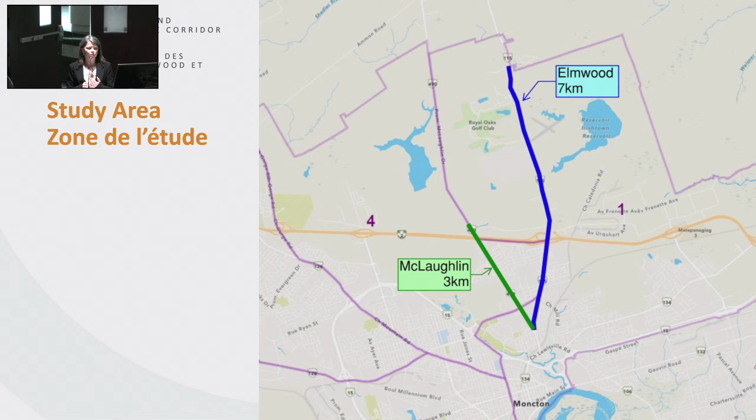At the end, feel free to ask in English or in French, your language of choice. Just as a reminder, the study area for this project included Elmwood Drive, about 7 kilometers long, beginning around the intersection of McLaughlin and Elmwood near Massey Avenue and extending all the way to Longfellow Drive. The McLaughlin Drive section was about 3 kilometers, starting at the same intersection at the south with Elmwood and McLaughlin and finishing near Granite Drive.

The objectives of the project were to update the city's transportation VISUM model and to assess some of the changes in vehicle traffic flows for future roadway connections and future land development in the area, and also to improve some operational efficiencies of key intersections and to plan for future transportation network improvements in the two corridors.

During the course of this study, which started in 2023, we did a lot of data gathering, including a lot of traffic data collection and review of right-of-way limitations along the corridor. In the image in the middle of the screen here, you'll see some notes about right-of-way.

The blue indicates the location where there's 20 meters of right-of-way. The green at the top along Elmwood Drive shows that there's about 30 meters of right-of-way, and the other locations have varying widths of about 24 meters.

Near the Trans-Canada Highway, there are some limitations with what we can do for infrastructure for pedestrians and cyclists. Underneath the bridges for the Trans-Canada Highway, in some sections there's only about 15 meters of space. At McLaughlin, and then at Elmwood Drive, there's about 17.5 meters of space.

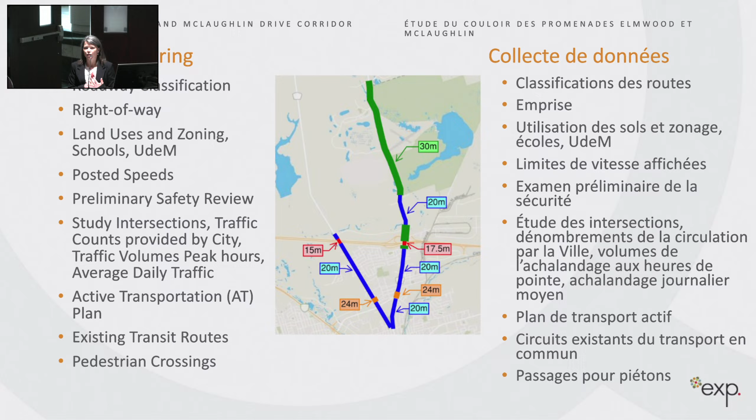I mentioned the VISUM model is a transportation model that the city uses to help plan for future road network improvements. The model was calibrated to the 2021-2022 population, and various scenarios were looked at for new roadway connections and trying to plan for future population growth in different sections along Elmwood Drive and McLaughlin Drive.

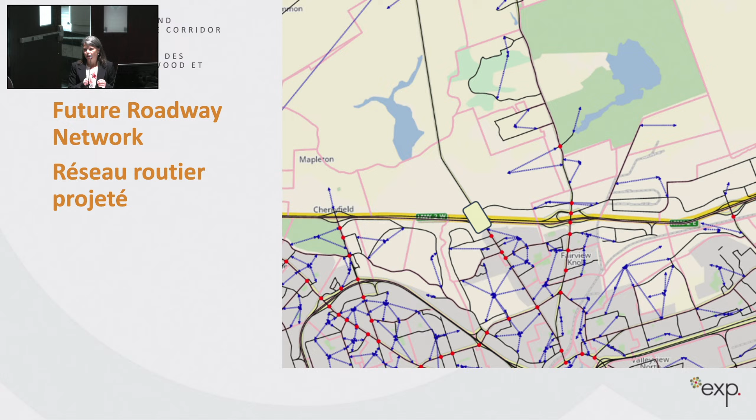In the VISUM model, there are links and nodes that allow us to project out how much vehicle traffic may disperse through the roadway network. So there were different scenarios that were looked at for new and future road connections.

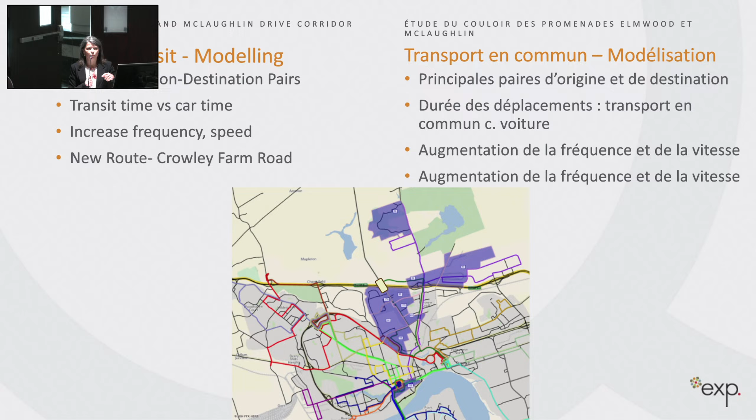There's also a component in the VISUM model that looks at transit modeling, but I won't go into those details. I want to get to the next slides about improvements. This slide shows some of the key intersections that were analyzed for vehicle delays in traffic operations, and where improvements were proposed.

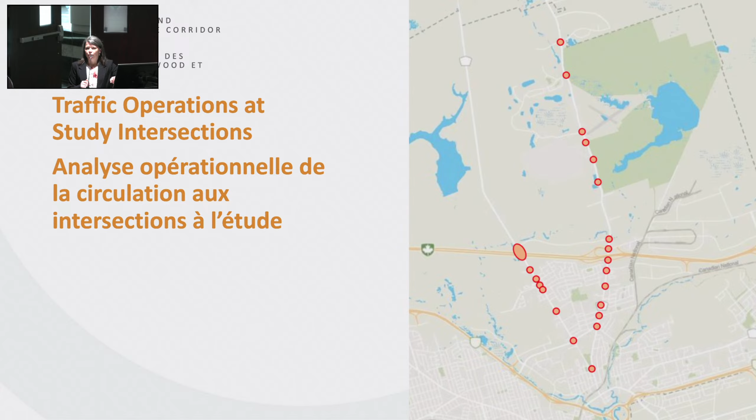As part of the analysis of different scenarios for road network improvements, scenarios 1, 3, 4, and 7 were analyzed for new roadway connections. I'll specifically mention scenarios 3 and 4. Scenario 3 had a new future connection to McLaughlin, from McLaughlin Drive to the Trans-Canada Highway.

In scenario 4, we looked at traffic volumes that might be generated or redirected if Crowley Farm Road was connected to Leopold Belleville Drive and to Morton Avenue. Future scenario 7 looked at all the future road network improvements along the corridors.

After doing all the analysis and coming up with a list of recommendations, there were key considerations important to highlight—more general recommendations for both corridors. Some included improvements to managing vehicle left turn movements along the corridor to improve safety for vehicles traveling on Elmwood Drive and McLaughlin. These aren't recommendations specific to a location, but more general for the entire corridor.

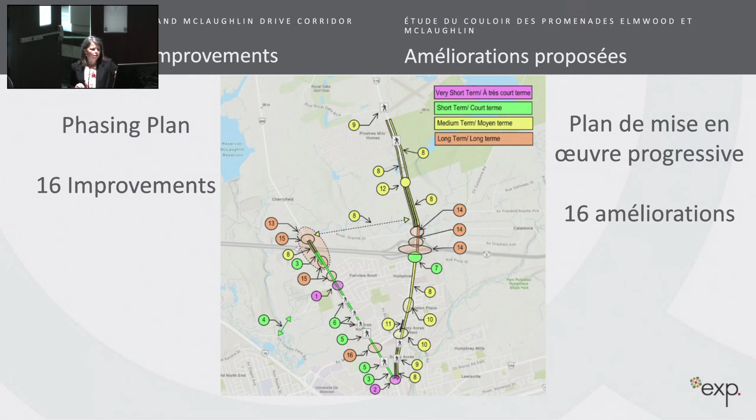Some concept plans were developed as part of the project to highlight the specific improvements that might be implemented on Elmwood Drive and McLaughlin, and these help us determine how much this could cost in the future.

The image on screen shows an orange line on the right-hand side, representing the multi-use path recommended to be constructed in the future. On both Elmwood Drive and McLaughlin, it's recommended to be installed on the east side.

The cross section shown is a 20-meter cross section, and we feel that with this 20 meters of space already available on these two sections, this would be a good compromise. I say compromise because sometimes cyclists and pedestrians don't like to share the facility, but because of right-of-way limitations, it was felt to be an acceptable compromise for pedestrians and cyclists to share it.

The middle portion of the cross section shows three lanes for vehicle traffic, though three lanes aren't necessary for the entire corridor length. Some places might want a left turn pocket for vehicles, while other locations could use the additional lane for a bus lay-by. With the 20 meters of right-of-way, we feel this would be a good cross-section for these two streets.

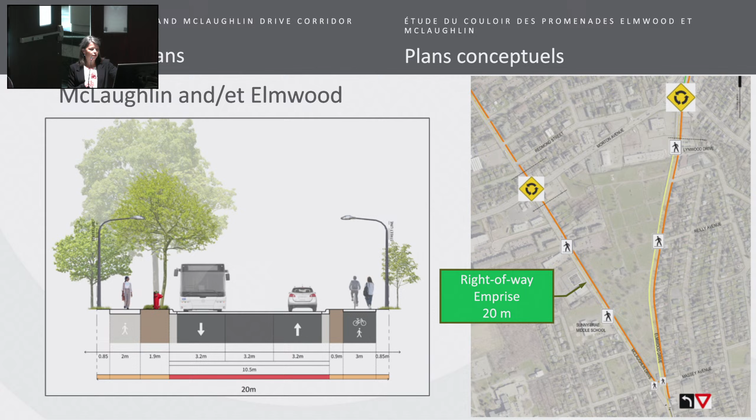This median doesn't necessarily need to be implemented throughout the corridor, but it's something to consider as the project advances in the design phase. It's a preferred cross-section to ensure motorists don't have to slow down and wait for somebody in front of them to make a left turn movement.

These aren't telling you that this is what must be built. It's just a recommendation of what could be built and what you might want to look for in the future if there's opportunity to buy additional property to provide this type of cross-section on the corridor. There are acquisitions that might be required.

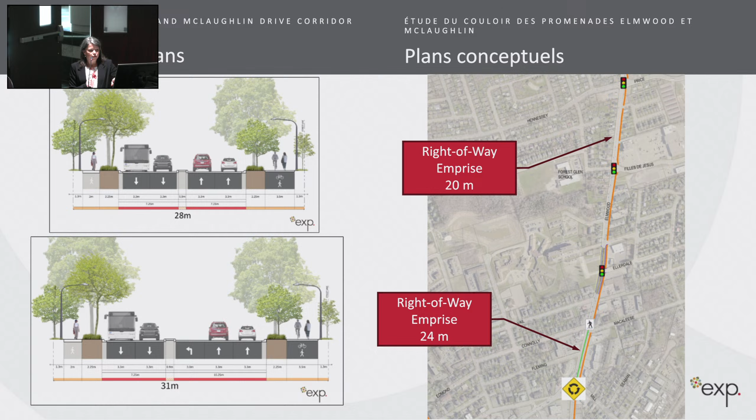The next slide shows the continuation of Elmwood Drive north of Hennessey to Granite. The traffic operations analysis showed that with roundabouts at the three major intersections here, vehicle delays would be less than if it stayed as a signalized intersection. The red rectangles in the middle of your screen show limitations again with right-of-way, and those all have to be considered in the future.

The multi-use path is still the recommendation for providing a safe space for cyclists to cross through this area because of the space requirements. This facility would offer a better compromise in solutions to provide facilities that are safe for both vulnerable users, the walker and the cyclist.

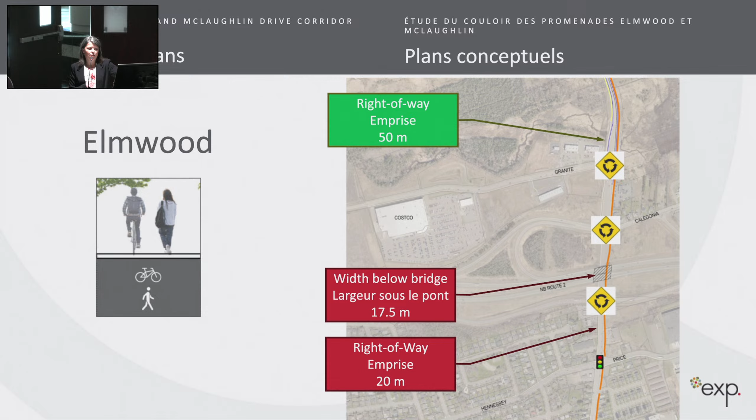Just a continuation of Elmwood Drive again, north of the Trans-Canada Highway. There are a couple of locations where the right-of-way is limited, shown in red, with the right-of-way only being 20 meters. The continuation of the multi-use path is shown on the east side, and it would terminate, or connect to, the existing path at Cedarwood.

There are some new pedestrian crossings recommended along the corridor, as well as a new sidewalk on the west side. Just north of Granite Drive, the sidewalk terminates and doesn't go anywhere. So if you need to walk along Elmwood Drive, either to take the bus or just because you live in the area, there is currently no facility for pedestrians or cyclists to travel along this corridor.

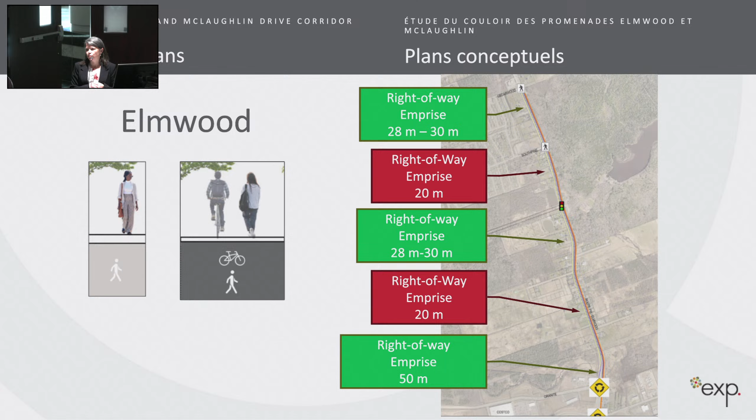And the last slide here for Elmwood shows new pedestrian crossings at Royal Oaks Boulevard and Longfellow Drive, and a new pedestrian crossing at Cedarwood as well.

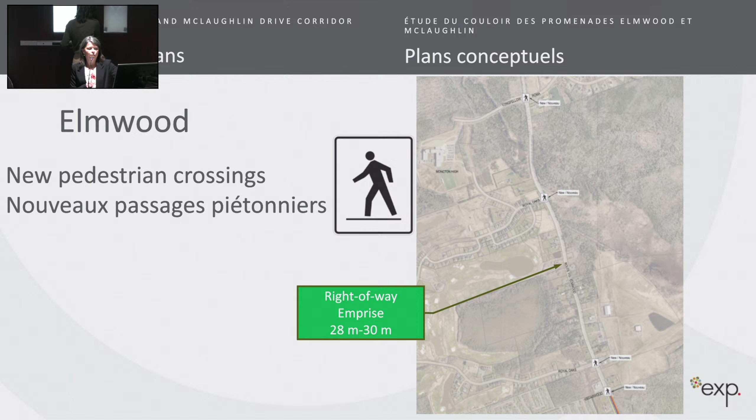The next two slides are for McLaughlin. The orange line shown on the east side of the road shows again the continuation of the multi-use path recommended to be constructed. The right-of-way along the corridor here is about 20 meters, so there shouldn't be any need, or very little need, to acquire right-of-way.

There might be some relocations of hydrants or utility poles if the project goes ahead with the three lanes for vehicle traffic, but at least the right-of-way appears to be adequate to provide the three vehicle lanes, a multi-use path on the east, and a sidewalk on the west.

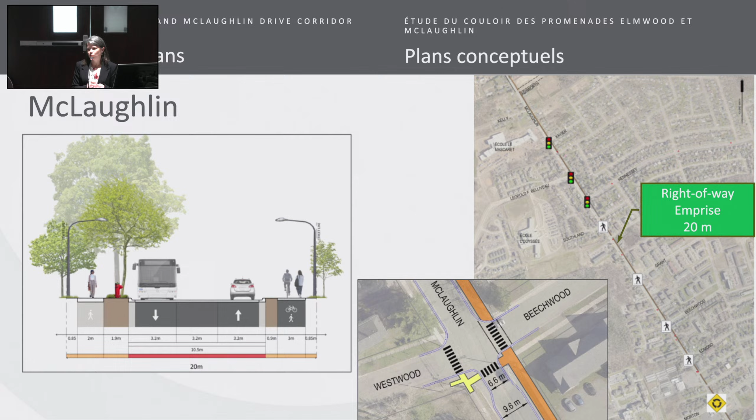There are some pedestrian crossing improvements recommended as part of the report to narrow the crossings. Currently, if you need to cross the road, it's about 10 meters, but in certain situations there's a possibility to reduce the crossing distance to as little as 6.6 meters, so it takes less time for the pedestrian to cross when the path is narrowed. The next slide is a continuation of McLaughlin Drive, north of Leopold F. Belliveau.

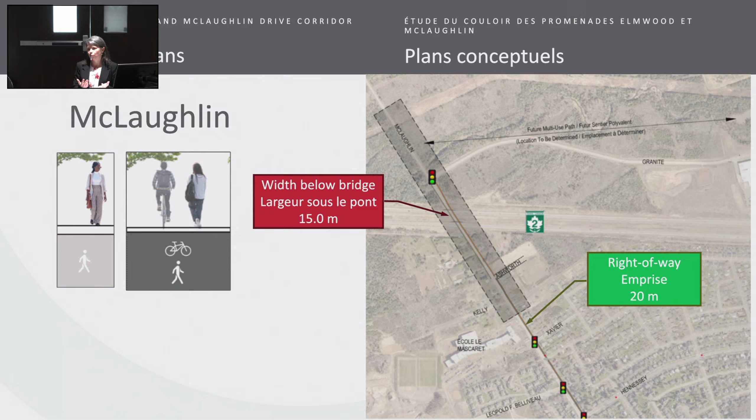The area here shows there are some limitation requirements with right-of-way. There's a future area where there could be an interchange with the Trans-Canada Highway. However, the plans for the interchange have not been finalized, so this just shows the area that would be impacted by new ramps.

The cost to build the entire project improvements was about $31 million. There are different details of the cost estimates provided in the final report. This image just shows the different locations of how the additional cost might be incurred for the different zones.

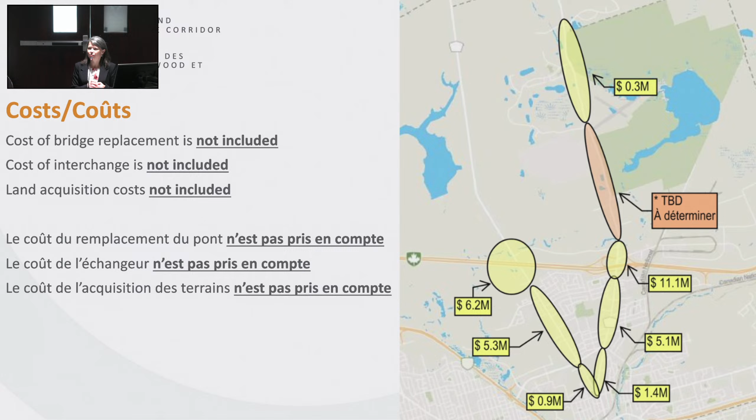The final couple of slides talk a little bit about the public consultation that began in May of 2025. There were some online survey questions asked, and I believe about 200 respondents answered the survey. We also had an open house at the end of May.

The respondents were asked a question about their priorities or top concerns for the corridor. A lot of people said cyclist safety is top of mind and feel it should be prioritized. Traffic congestion was the number 2 item on people's minds, and pedestrian safety came up in the 3rd category.

With regards to some of the improvements provided in the survey, respondents said the most beneficial improvement they could see from the list of proposed improvements was the connection to Crowley Farm Road. The least important improvements were related to the bike lane delineators on McLaughlin, which were shown to be a short-term improvement the city is looking to implement.

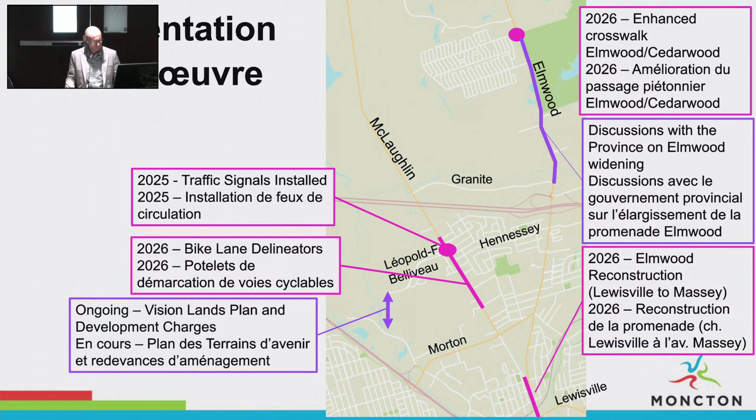So the recommendation is, when these projects are being designed and tendered, we'll come back to council with some details. I'd like to point out that the cost estimate, just over 30 million for all these improvements, does not include land acquisition, does not include pole relocation if required, and also does not include the Elmwood Drive widening portion between Granite and Cedarwood. So there's a lot of components excluded from the cost estimate, and once we get down to detailed design, it's fair to estimate that these costs will go up, especially when we look at land acquisition for some of these components.

We're here to answer any questions you may have. Thank you for your attention.